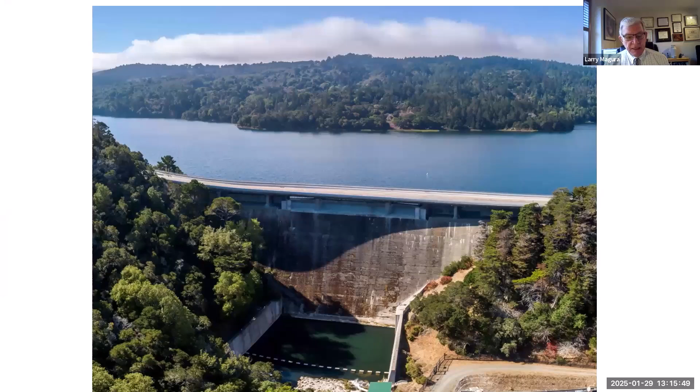Here is Crystal Springs Dam as it looks today. About 10 years ago, Kiewit Corporation on the West Coast put a new spillway on the dam here. And that's the first modification since the dam was completed in the 1890s. This is the reservoir behind it.

And right about where my cursor is moving here is where the San Andreas Fault is located, which is interesting. Another location here is the dam. And if anybody ever wants to visit the dam, do not rely on the directions you'll get through Google. You're going to end up in a parking lot at a golf course.

I was born and raised in San Francisco, grew up in the peninsula right in this area here, attended Hillsdale High School. And by the time I was a teenager, me and my chums would love to go hiking. And we hiked up to Crystal Springs Dam on a couple of occasions and would slip under the barbed wire fence and stand out on top of the dam, which at the base, it's 145 feet above the bed of the stream. And that was when I first became interested in the dam.

And then years later, when I became a member of the History and Heritage Committee, I discovered that through some oversight the dam had never been honored by ASCE's National Historic Civil Engineering Landmark Program. And so I prepared the application, which was accepted by the History and Heritage Committee, and wrote this article, which appeared a year ago in the March-April 2024 issue of Civil Engineering Magazine.

The editor-in-chief gave it a sexier title than I would have come up with, A Concrete Dam for the Ages, and there's an historic photograph there. And so this presentation builds on the research I did for both the application and the writing of the article, but it includes some things that I didn't have time to talk about before.

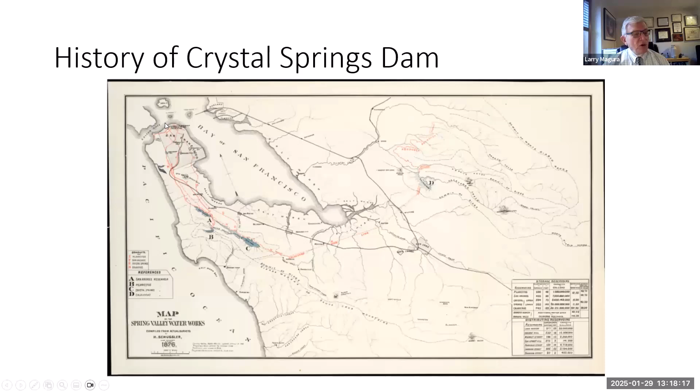San Francisco was by far the largest city on the West Coast in the 1860s, 1870s. The second largest city was Sacramento, which is much smaller. And number 3 was my hometown now, Portland, Oregon. LA was just an afterthought. It was just a small town in those days. Always had a Mediterranean climate. It's only 46 square miles of surface area in the city of San Francisco.

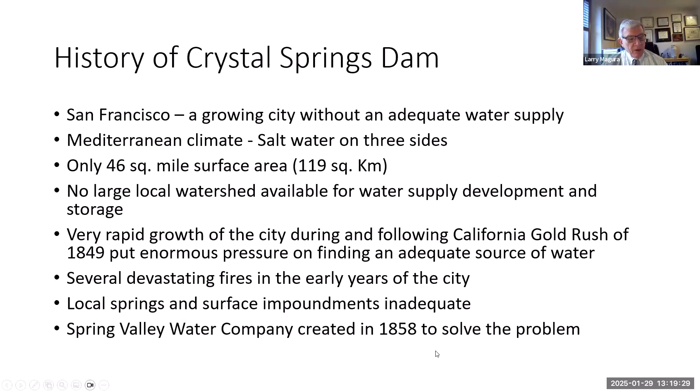There's no large local watershed available within the city limits to supply water, and so water was always a critically short quantity. They had several devastating fires in the early years of the city because it was built primarily out of wood. They gradually turned to more durable materials, brick and concrete. There were some surface springs, but in those days, people would capture water at the springs and put it in barrels and drive horse-drawn wagons up and down Market Street selling water. So Spring Valley Water Company was created in 1858 to solve the problem.

Born in 1842 in Germany, he had a formal engineering education in Zurich and Karlsruhe. And he arrived in San Francisco in May of 1864 at the ripe old age of about 22, turning 23. He spoke no English when he left Germany, but by the time he completed his journey across the Atlantic and across the newly completed Panama Isthmus Railroad and up the West Coast, he had learned a fair amount of English through talking with the crew and reading magazines. So that's a great way to learn a new language.

When he arrived in San Francisco in May 1864, he was hired a couple months later by the Spring Valley Water Company at an initial salary of $50 a month. And he worked on various small reservoir projects in San Mateo County up until 1866, when obviously his brilliance and his attachment to the board of direction for Spring Valley, they promoted him to chief engineer. And that's a title he maintained until he retired in 1919. He was an ASCE member, but that was later in his career that he joined. And he died in San Francisco in April 1929, a few months before the great stock market crash, Black Tuesday.

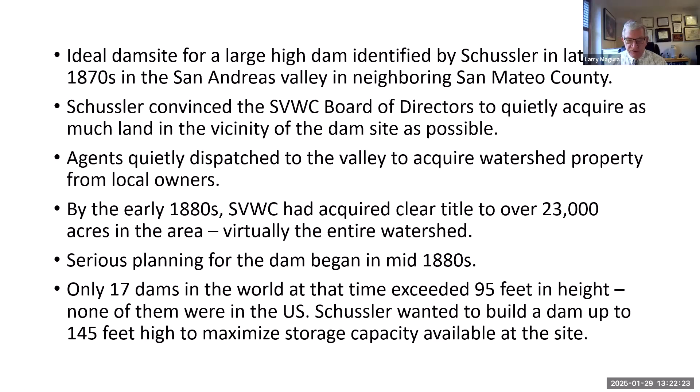Schussler wanted to build a dam up to 145 feet in height to maximize the storage capacity that he had available at this excellent dam site. He wanted to make the structure out of stone masonry, which was considered state-of-the-art in the 1880s. But he lacked a good local source of stone, good competent stone. This area is all part of what's called the Franciscan Formation, which is a melange of many different types of rock, but none of them were judged suitable for dam construction.

It's interesting to note that although the site had favorable geology, Schussler was an engineer. He had no specific knowledge that we can find in his surviving notes and things that they had any awareness of the proximity of the dam site to the San Andreas Fault.

Schussler rapidly pivoted from stone to mass concrete as his primary material for dam construction. And apparently he did that without a clear understanding of where he's going to get the Portland cement, because there was no large-scale Portland cement industry in the United States in the 1880s. It had to be ordered and imported from J.B. White and Brothers in Swanscombe, England, and shipped in watertight oak barrels. It had to be shipped a long way.

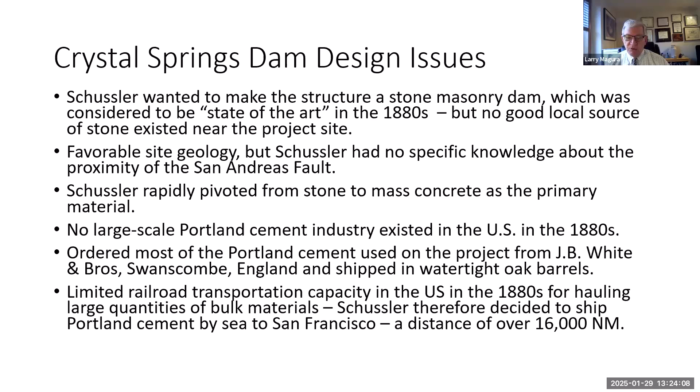And shipping it by water was really the only option, because although there were two transcontinental railroads by this time in the United States, they were dedicated to hauling passengers and high-value freight and were not set up to transport large quantities of bulk materials. So these materials were transported by ship, a distance to San Francisco of about 16,000 nautical miles.

Although the dam axis is located only 1,100 feet east of the trace of the San Andreas Fault, again, Schussler had no specific knowledge about this. The first description of the San Andreas Fault was published by University of California, Berkeley geology professor Andrew Lawson in 1895, 5 years after Crystal Springs Dam was completed. And there are no records of any previous movement on the San Andreas Fault north of the Tehachapi Mountains since Spanish colonization of California in the 1770s. The first movement in the northern section of the fault occurred on April 18, 1906, which destroyed San Francisco.

It's interesting to note that the dam received no damage from either the 1906 earthquake or the nearly as damaging 1989 Loma Prieta earthquake. And it is inspected every 2 years by the California Division of Safety of Dams, and it's always passed with high marks.

So how did they transport Portland cement to the dam site? Well, they used clipper ships, Cutty Sark as a typical example. It's the world's last surviving clipper ship, actually. They were the typical bulk haulers of the 1880s. Steamships that were coming online were very popular, of course, but you could never carry something on a steamship 16,000 nautical miles. You couldn't possibly carry enough coal to keep it going. And steamships were mostly confined to the transatlantic trade in those days.

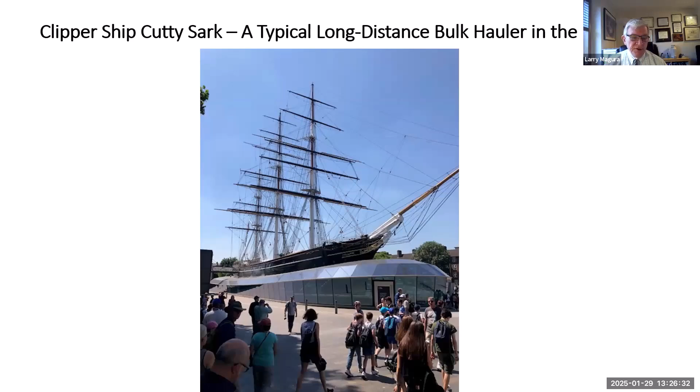And when I grew up in San Mateo, I attended A.P. Borel Junior High School, named after this gentleman. And again, small world, I discovered years later that he was the great-grandfather of my best friend in college, my undergraduate days. It is indeed a small world.

This is called, of course, the Gilded Age. These were the movers and shakers of San Francisco economically and socially. Of course, there was no income tax in those days. So what you earned, you got to keep.

Schussler was concerned about possible cracking of the concrete. He must have studied concrete design a little bit in his college days. And so he was concerned about cracking due to shrinkage and heat buildup during the curing process. And his innovative solution cast the concrete into interlocking, irregularly shaped blocks in layers no more than 3 to 4 inches thick, and to eliminate voids. Cover the blocks with boards to keep wet for several days to help with the curing.

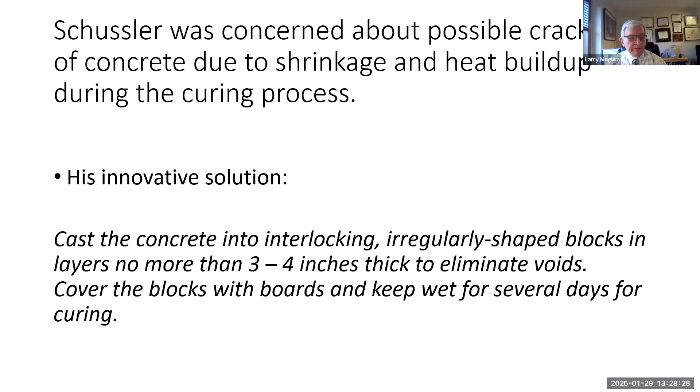And this is a schematic of how the dam went together. It was like a large Lego set of interlocking blocks. When you visit the dam today, you're looking down on the top of this, and that's exactly the view you get today. A couple of sheets of plans showing this have survived to the present day, and of course they're all hand drafted. But look at all the angles and interlocks, and that's exactly the way it was constructed.

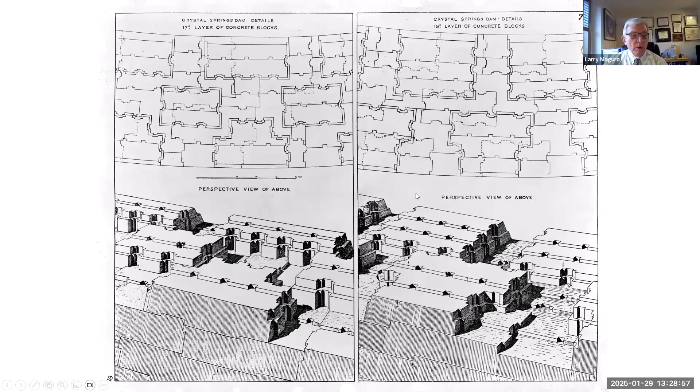And so they had a staff photographer document using glass plate negatives the construction of the dam, and a treasure trove of these original glass plate negatives were rediscovered by Mike Hausch, the archivist for what's now the San Francisco Public Utilities Commission, the successor to the Spring Valley Water Company. And he found these about 10 years ago and had them all made into positives and digitally scanned in high resolution. And since they're glass plates, they're not pixelated, and they can be enlarged infinitely.

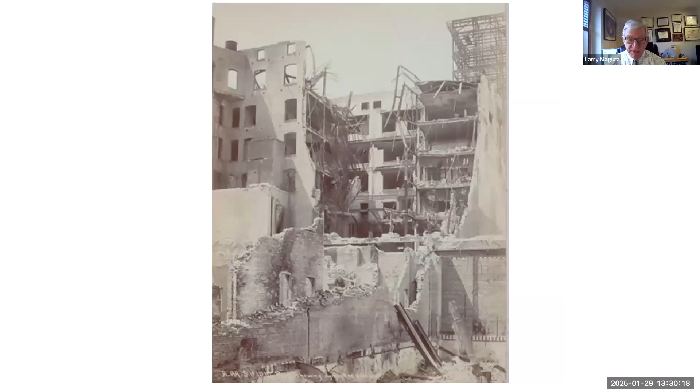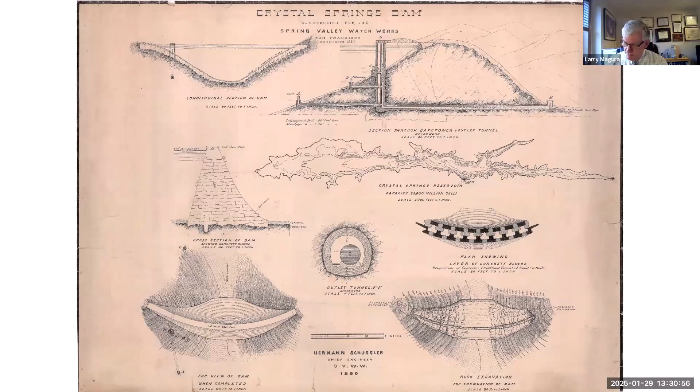This is the cover sheet for the plans for the dam, the year the dam was completed, 1890. And you can see it is an arch dam, but it is primarily a gravity dam, gravity structure. It's the mass of concrete that holds it in place. I call your attention to the key section right here in the cursor. These are all innovations that Schussler came up with because he just had an intuition, I guess. There were no guidebooks, there were no standards available to him. He had to figure it out as he was going, but he obviously did a brilliant job.

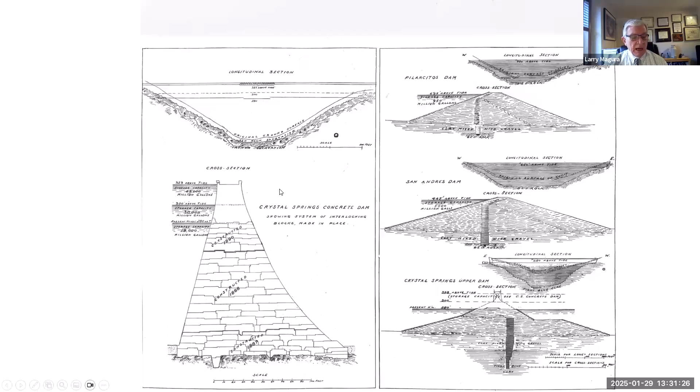Here's a close-up of these drawings. Here's the keyway excavated down into bedrock. That is exactly how the dam was built. They originally thought they would complete it to about elevation, right about here, elevation 130, and that would be sufficient. For reasons that become obvious in a minute, they went all the way up to elevation 145, which is the height the dam is to this day.

Construction began in 1886, clearing the dam site, and Schussler, again, had very specific directions to his people, to the laborers, no explosives to use. He did not want to risk cracking bedrock. He wanted to maintain that tight to avoid leakage in the dam. You can see here they are working by hand, clearing and grubbing. It took them a year to prepare the dam site for receiving concrete.

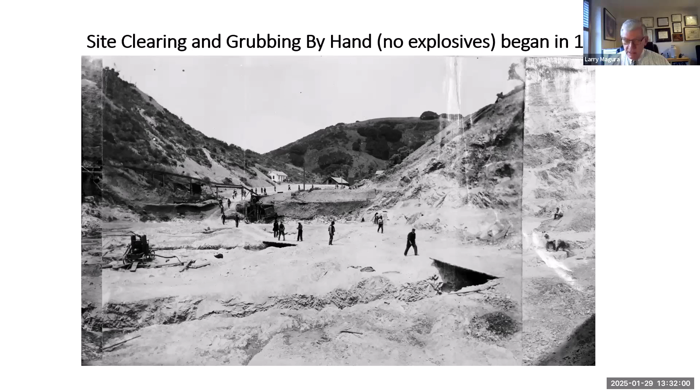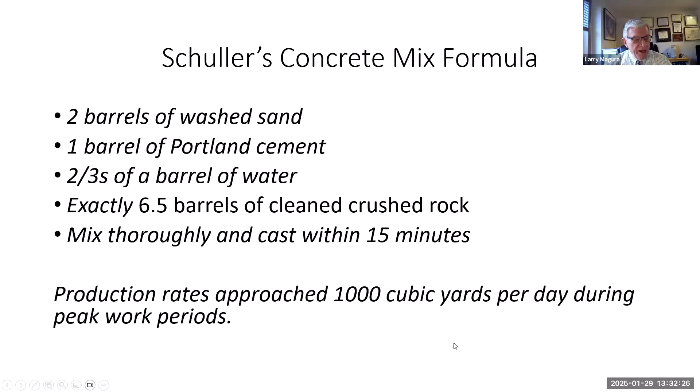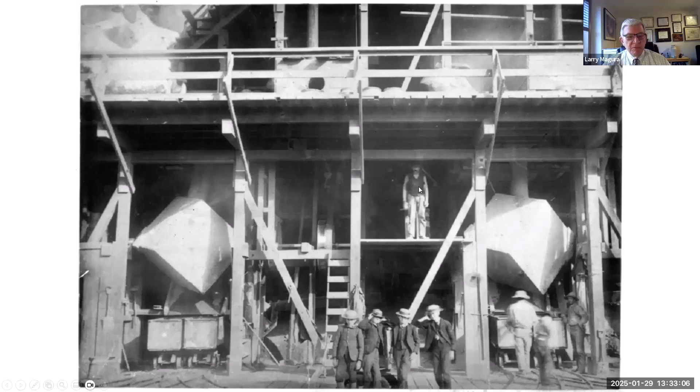And notice he had two, I think there were a total of 4 mixers, and they're cubes, steam powered. And we believe that he utilized the barrel staves from the watertight barrels that were used to ship the Portland cement as the hog fuel to fire the boilers. And you see these young gentlemen here with their boater hats on site, and laborers wondering, what are these guys doing standing out here in the way? This is undoubtedly a foreman overviewing things. So that was the mixing plant.

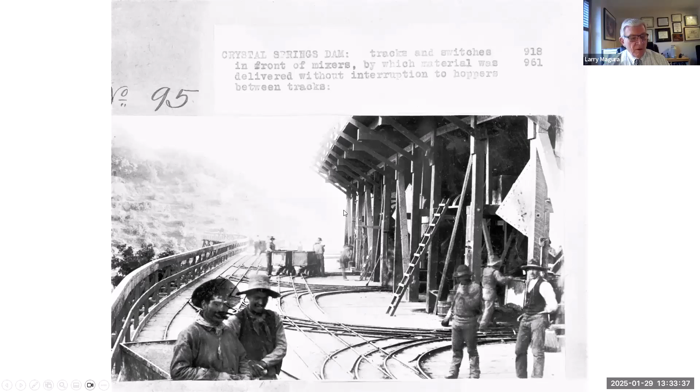They used mining carts to transport the wet concrete to the point where they needed it. Schussler installed a series of 12-inch diameter riveted wrought iron pipes, vertical pipes, tremie pipes, we would call them today. And they would deliver the wet concrete to where they were pouring. They were set up to work their way back and forth across the face of the dam and gradually build it up.

And I asked him, did they do any strength testing of it? He couldn't recall, but he guessed it was probably in the 3,500 pounds per square inch range. This dam is inspected every 2 years by the state of California, Division of Safety of Dams. It always is passed with high marks.

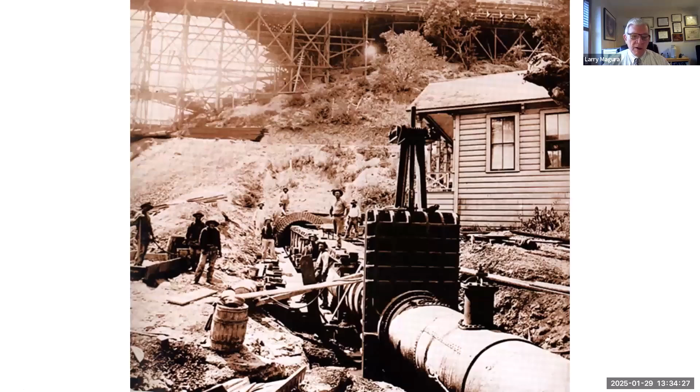Schussler not only designed the dam, he designed the outlet works and the valving. You couldn't order valves like this out of a catalog. You have to design and build them. We do know that before he left Germany, he spent some time as an apprentice in a foundry, and he came up with his own design for a high-pressure wrought iron pipe. And the characteristic thing about his is he had a double row of rivets as opposed to the single row that was considered standard in those days. So his pipe was capable of withstanding higher pressures than anybody else's.

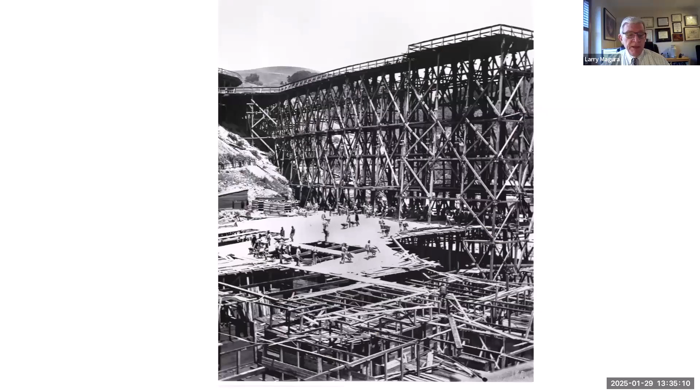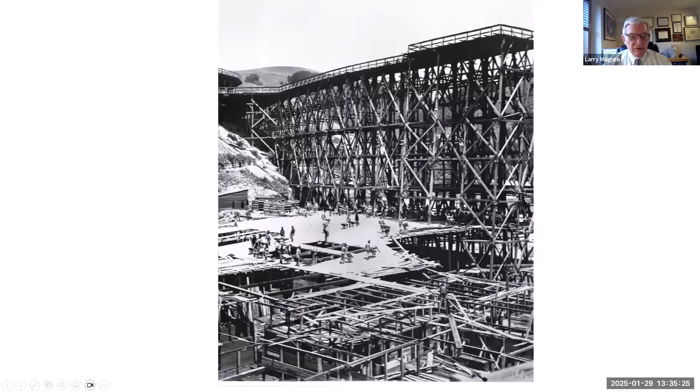Dam site at the peak of construction, 1887, 1888, had a workforce of about 1,000. Here you can see the planks covering the wet concrete areas to shade them from the California sun. Here's the trestle. The mixing plant is just off the left edge of the picture here. Excellent photograph here. Here's a slightly later vintage. This is out in the middle of the boondocks of San Mateo, a very rural area at the time. And so they had to provide housing, meals for the workforce of about 1,000 men. That's the way you built things in those days.

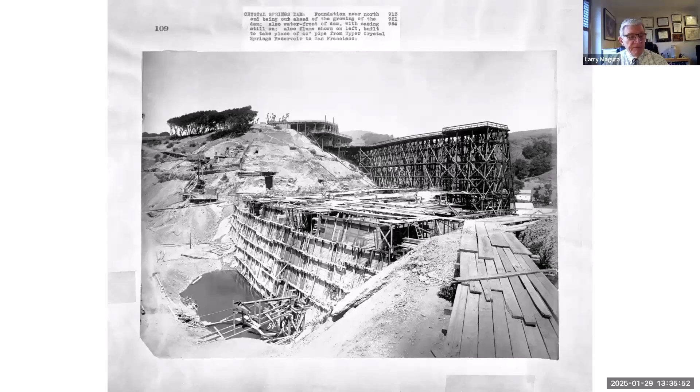I love this picture. Here you can see, this exactly shows planes of construction and the layers. It looks like they're about 6 or 8 inches thick in this view. And I love this fellow right here, this laborer. He's looking right into the lens of the camera at the exact moment that the photographer squeezed the bulb and created the image. And notice there's no safety equipment, of course, no hard hats, no safety shoes, all hand labor, not even wearing any gloves. Guess that was okay. It was good work, if you can get it.

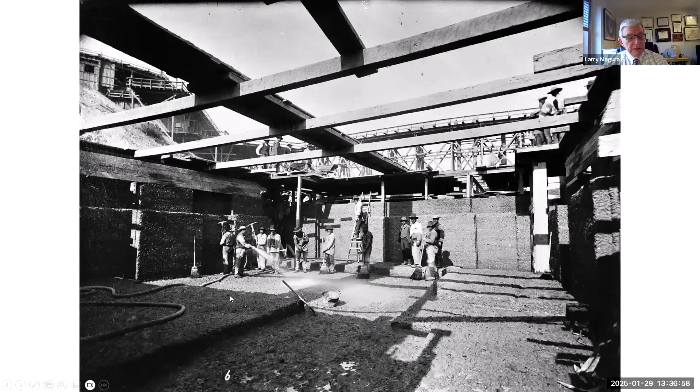Here's another view. Here's a foreman climbing up a ladder, but you can see it was just built up in a big layer cake fashion. Schussler was very intent that if there were any rock pockets, the crew here looks like they may be cleaning up a rock pocket here, they would chip them out and make it all firm, ready for the next pour. Here you can see they're spraying with water to keep the concrete moist for the initial curing and cleaning it very carefully. Again, it's all set up with some timber beams here to create a shaded environment to keep the harsh sunlight off the fresh concrete.

They thought they'd complete the dam to about 130 feet, but the December-January period of 1890 was the wettest winter on record, and they had uncontrolled spill over the top of the dam, which had just been completed a couple of months before that.

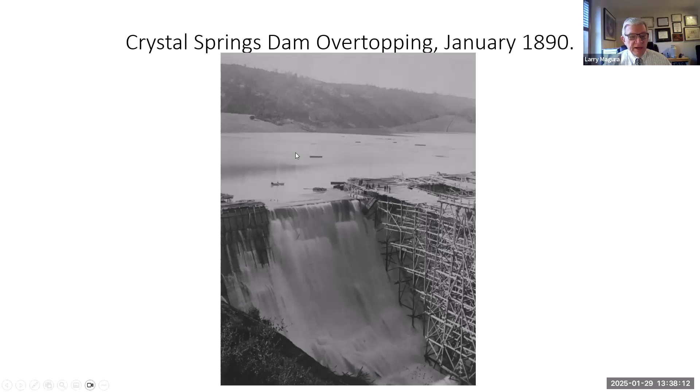And I'm sure the people in San Mateo downstream must have been very concerned, is the dam going to fail or not? Well, no, the dam held up just fine, thank you. But they realized that they needed a taller dam. And so the board approved adding 15 additional feet to complete it to the full design height we have today, 145 feet. This is the original county road that went over the top of the dam.

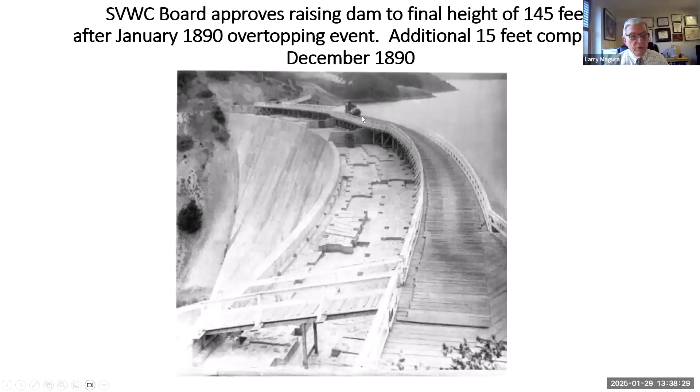Here's another shot of Schussler at the completion of the dam in 1890. This is his proud baby. It looks like he's sitting in the middle of the spillway section. Quantities of materials used, and these are from the records that Schussler, he did an after-action report to his board, and these are the numbers that did survive.

194,550 barrels of Portland cement. Well, divide that by how many barrels could you squeeze into a sailing ship in the 1880s, and that'll give you the number of voyages that was required to deliver that to San Francisco. I'm guessing maybe 30, maybe more voyages. 389,100 barrels of washed sand, which came locally from North Beach. And of course, it would have had salt in it from being next to the ocean, but they washed it to wash the salts out.

Crushed rock, exact quantity was unknown. The total volume of concrete is known. It's 157,200 cubic yards. That must have been an astronomical number in those days. Typical work day was 10 hours. The work week was 6 days a week. And in Schussler's report, the cost of materials and labor in 1890 dollars, $2,192,000. If you just apply normal inflation, that'd be approximately $80 million in 2024 dollars. But of course, you couldn't build this dam for $500 million today.

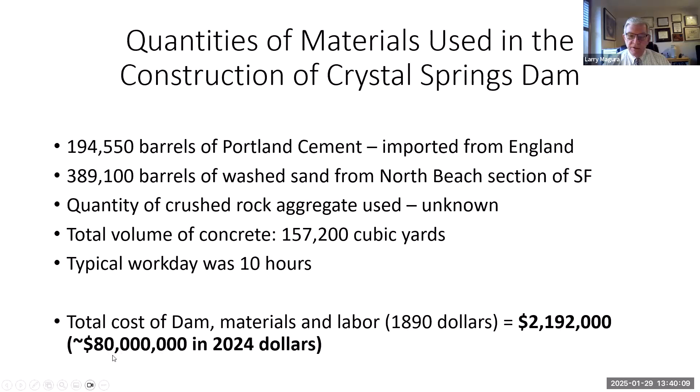It's interesting to look at the cost of labor that was in Schussler's final report to the board. Project engineers, 60 cents an hour, same as a foreman. Blacksmiths were considered skilled tradesmen. They got 50 cents an hour. Blacksmith helper, a little lower. The laborers, 31.25 cents per hour, which was a living wage in those days. Amazing.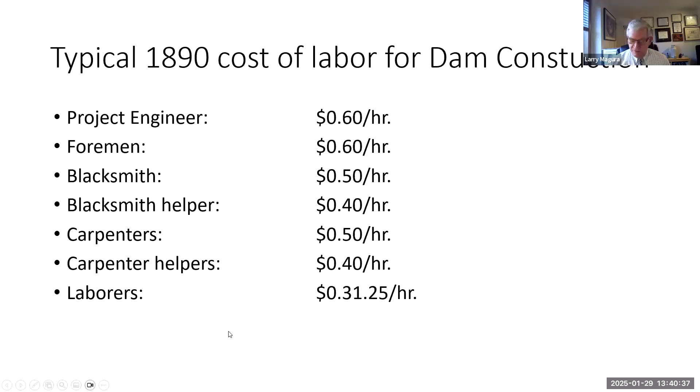Well, how did they pay for the dam? Well, they issued bonds. I have a copy of the certificate at home, and you read through the fine print. They were redeemable in gold. That's right, gold, which was, of course, California. The gold rush was over by this time, but they were still mining a lot of gold, hard rock mining in the Sierra Nevada foothills. And gold was $16 an ounce in those days. It's what, $2,400 or so an ounce today. But these were like gold certificates. Of course, the owners of the Spring Valley Water Company were all stockholders as well. That's how they paid for them.

This is an interesting highlight. In 1895, ASCE, the American Society of Civil Engineers, hosted the annual convention in San Francisco. Mr. Schussler was prevailed upon to lead a field trip to the dam site. He was not yet a member of ASCE, but he was certainly proud of his creation. And this is the Surreys with the fringe on top on the field trip on that day in 1895. Quite a remarkable photograph from California history.

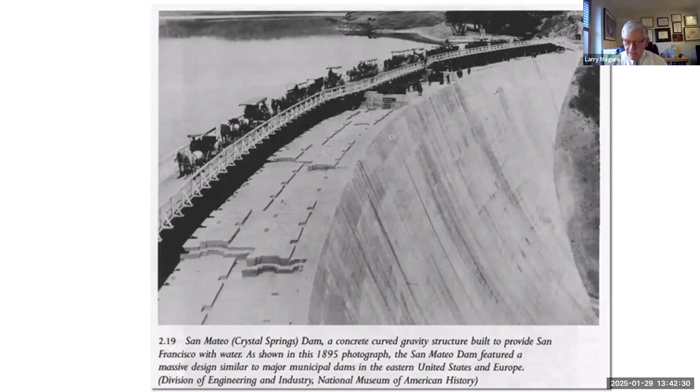Let's talk a little bit now about the nomination of the dam as an ASCE National Historic Landmark. The criteria are pretty clear and kind of obvious. The project must be judged to be of national historic civil engineering significance. Well, Crystal Springs was the first mass concrete dam in the world, as we now understand it. It must represent a significant facet of civil engineering history. Well, we certainly must have some special uniqueness, the first of its kind, etc. Well, that's the same thing here. The plaque that we're going to place for public view, and it must be at least 50 years old. Well, Crystal Springs was way more than that, and must have room for mounting of a 12 by 18-inch bronze plaque. I'll show you that plaque in just a moment.

And the owner of the dam, which is in this case the San Francisco Public Utilities Commission, has to provide a letter of support. And their only concern when I saw the letter from them was that they wanted to make sure that achieving this status, which they were in favor of, would not encumber their ability to further update and maintain the dam going forward. And I assured them that, yes, it would have no effect like that. And so on December 6th of 2023, there's yours truly introducing our president-elect.

Feniosky Peña-Mora. In politics, water is king in California. It always has been. And I'm standing on top of the dam. There's a state highway, Highway 35, runs right there. And they just preemptively closed the road, closed the state highway. They told Caltrans, the state transportation agency, we're closing the road for this presentation. And Caltrans said, well, okay.